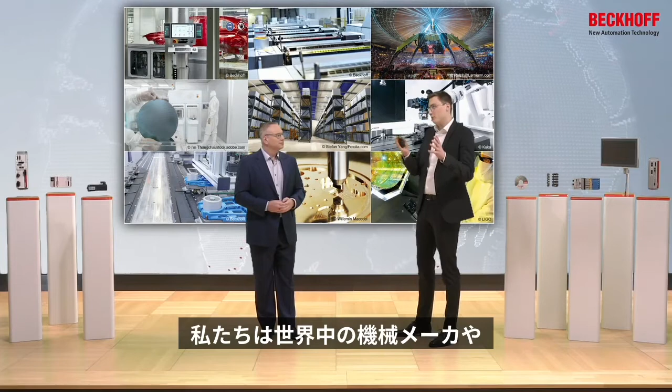Yeah. So maybe to bring this together and coming a little bit back to our bigger story, we are talking with machine builders and end customers from more or less all over the world, so Hawaii included. And we are doing this with companies from all kinds of industries, so from manufacturing to pharmaceutics and to cosmetics and everything else. And to prepare for this week, we have actually written down what these companies all tell us, what they think are the big challenges they have at the moment and which they will have in future. And this leads us to the following chart.

So we have written down some challenges which end customers and machine builders from different industries face at the moment. For example, the need to reduce the space requirements of the machine. Maybe Rob, can you talk a little bit about one or two of the challenges which are there?

Well, that's a little bit of everything, right? We want to always make the machine smaller, but if I'm doing things in a clean room, right, then my space is really expensive. Also, if I'm doing it somewhere where it's cold. Anything I can do to reduce those environmental constraints and say, okay, I make it as small as possible. I don't need to build a new factory. I don't need to build a new clean room. I can do more with less.

For pharmaceutical, things like track and trace is really important, that we're able to know exactly what goes in every product. And then things like no glass-to-glass contact, so that there's a lot less chance of breakage. And that's really well done with XTS and XPlanar, because each product then sits on its own mover. And we can pull those out independently, so there's no longer wasting, oh, one of these was bad, we need to scrap 20. No, one was bad, we scrap that one. And we know exactly which one that was.

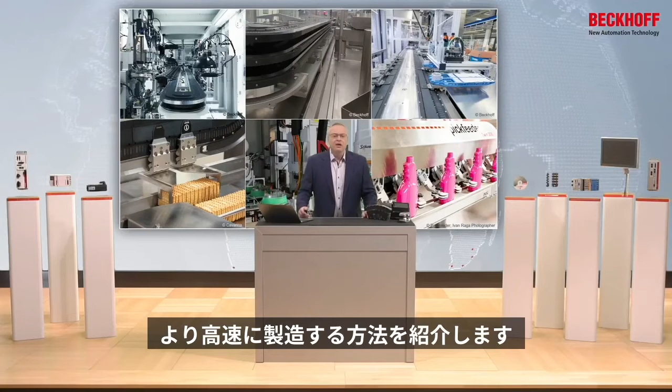So if we take a look at some of the existing examples that we've got out there, we do things with heavy movers and 4 or 5 kilograms. We're making the inner housings for airbags on movers. And the XTS was a huge boon to that system. It drastically shrunk the size of the assembly line because only one station needed to be doubled up and the rest of the stations could remain singles.

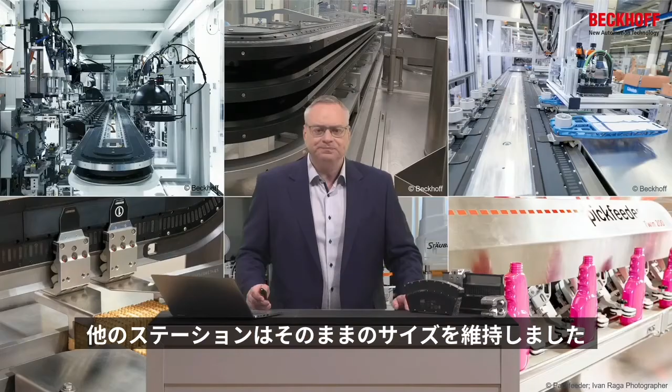Then we've had other places where they need to get a super tight format. So we needed to get movers 20 millimeters spacing together, but the movers are 50 millimeters thick. So the only way to do that was to stack them up. And because the XTS is so thin, we're able to stack 3 layers of an XTS on top and now bring tooling in at a 20 millimeter spacing.

We've had other customers use multiple movers together to have 2 movers carry a varying dimension of product. And we've had other systems where they'll bring in various holders that then mate to the movers and continue through. For the last year and even earlier, we've been producing 3 XTS fully finished systems per day. So there's thousands of systems out in the field, more than 12 kilometers of XTS installed, and it continues to grow. And that's because the XTS allows you to put a mover wherever you want it.

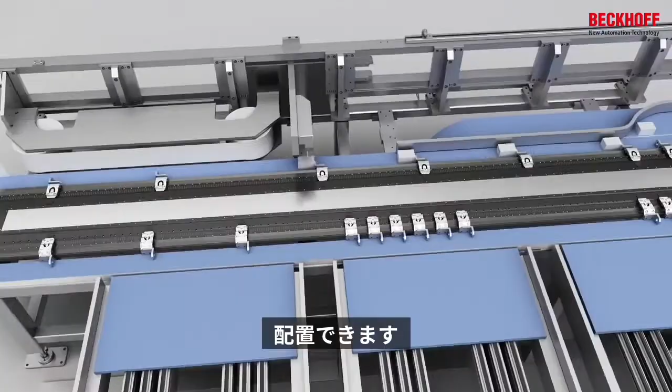And you can place the movers with different products in different places without even necessarily the touch of the button. It might actually recognize the product and recognize that it has to go to a different location or has to make a different format. So maybe for this product I want to group up 6 at a time and I want them all evenly spaced, or I want 6 at a time, but I want them separated out because they're going to go into a different form of packaging. Basically, each mover as it gets the product can figure out and decide where it needs to go.

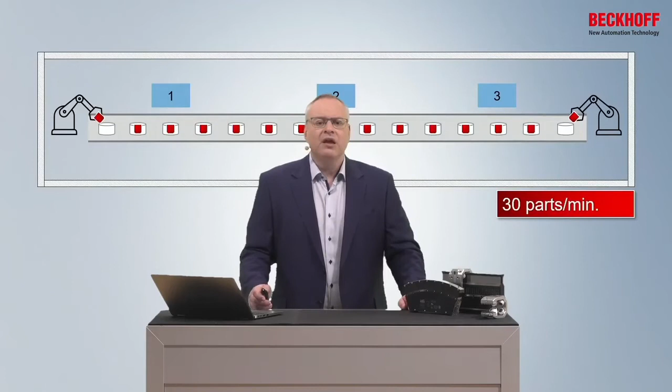So a typical transport system, or a lot of machines, have an indexing chain or some form of indexing system where basically all the processes are tied right together, and I index the mover from station to station and say, okay, there are now X number of movers in front of you, or X number of products in front of you, work on them, and then everybody wait, I'm going to index everything, and then everything can work again. Or I go to an asynchronous flow, but an uncoordinated system.

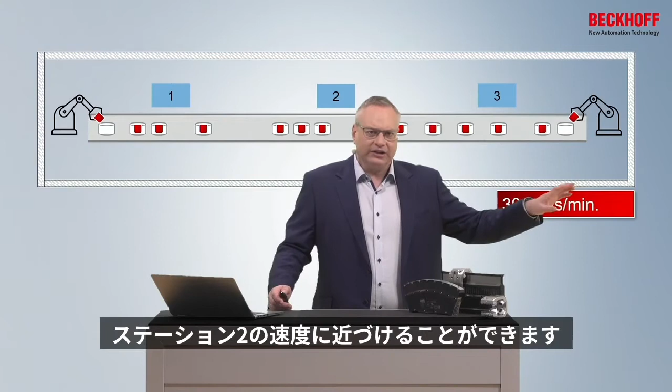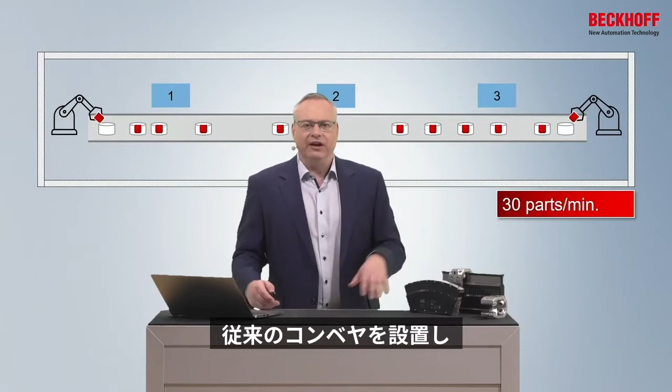And now I have buffers, and normally I have to put a lot of conveying in between each machine. So the product that comes out of my processing station 1, my machine 1, comes out at whatever rate it runs at. I can get it close to the rate of product of station 2, but not necessarily exact. And for that, I'm going to need a bunch of buffering space. So I will have a conveyor, typically conventional conveyor, that's holding a number of products.

And as soon as station 1 lets go of the product, once it gets to station 2, I've lost the information about that product. Or someone comes along and says, yeah, I need to take one of these for inspection. I have no idea which product is in which order, so I have to re-find it at station 2 if I want to know anything unique about that specific product that was produced for track and trace.

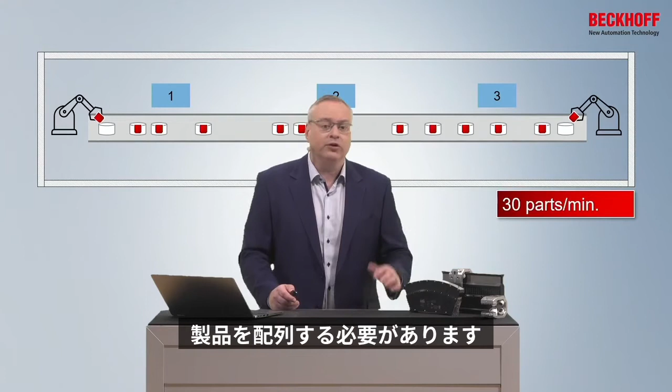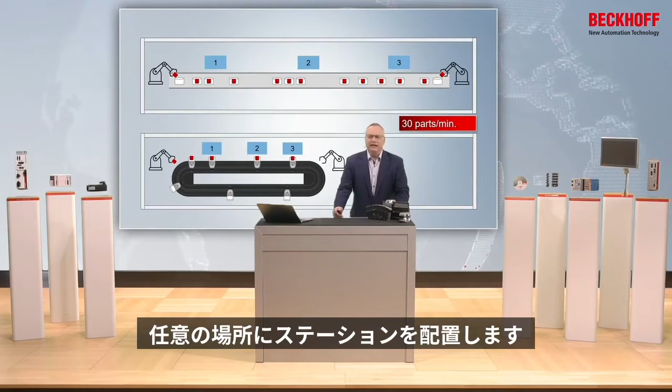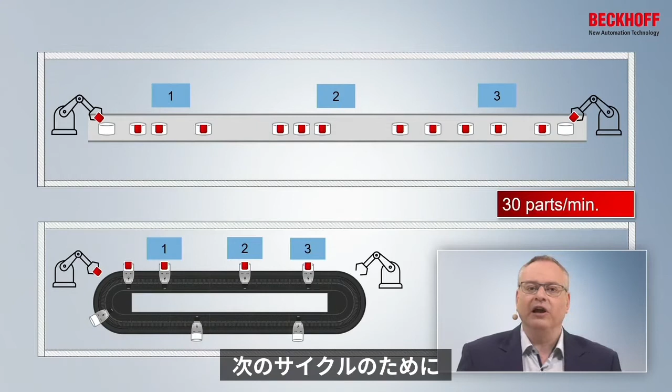So what we do with the XTS is we can make it a lot smaller. So we'll put the stations where we need them. So now I directly take product out of station 1, transfer it asynchronously to station 2, and from station 2 to station 3. So oftentimes I will have product underway. So when station 1 and 2 are working on product, there's a mover bringing product into the station for the next cycle.

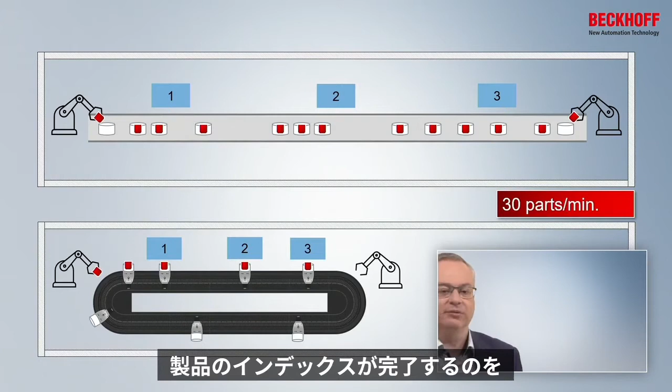So my transition of my motion times is a lot quicker, and I get a higher throughput because I'm not waiting for the entire system to index the next product in. Or I go and say, okay, I'm able to make 30 products per minute. Everything in my system waits on the middle station. So the middle station takes 2 seconds. I can't speed it up. If I try to speed it up, I'm going to be detrimental to my process. So ideally, I'd want to slow it down.

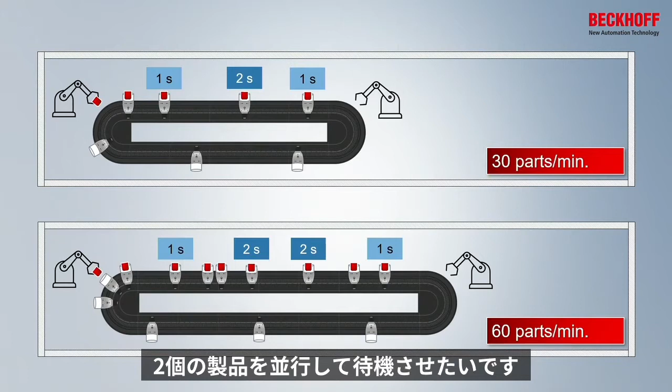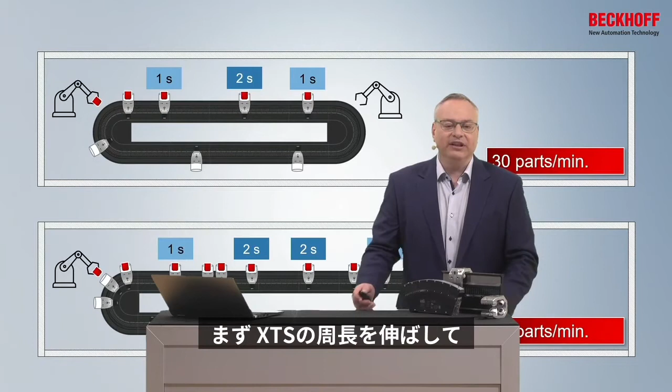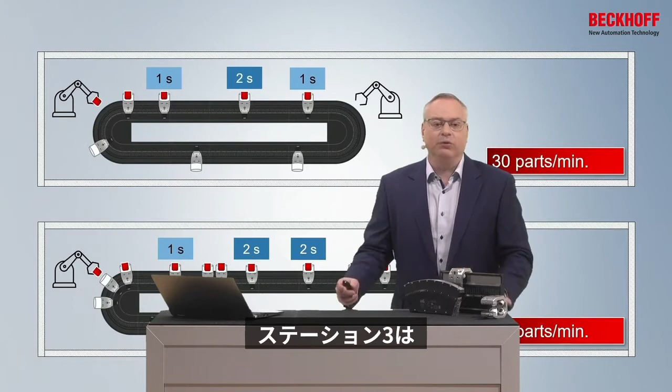But to get anything faster out of the machine, I need to work on 2 of these at a time. And if I have a typical indexing system, now I need to have every station have 2 at a time, because I will index 2, work on 2, index 2, work on 2. With the XTS, we can change that up and say, fine, we'll do that. But now I'm going to space everything out and say, all right, asynchronously, station 1 is kicking product out at whatever rate it can achieve. And then station 2 is working on 2 at a time. Station 3 is working on 1 at a time. So I don't need to double everything up. I only need to double up the stations that need the time.

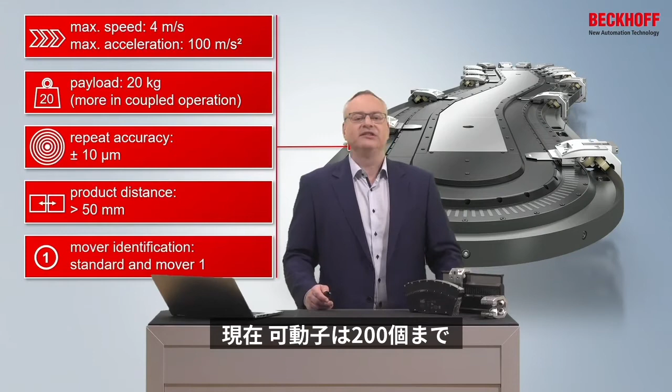In my toolkit, I've got some very simple components. I've got some motor modules that provide the current, and they provide the feedback of the system to tell me where the movers are, and they drive the movers around, right? And those motor modules get me all of the capabilities of the XTS. Very high accelerations. With different tracks, we can do very high payloads, 20 kilograms, even more. 80 kilograms, 90 kilograms, that's all doable. Super high accuracy, very small product spacing, all of that extremely flexible on the XTS. Systems up to 100 meters in length, 200 movers, that's very easily doable today. And that will only extend.

Then we take our movers and we mount them on a rail system. And that's what gets the movers around. That's what holds everything in place and allows us to go through the curves at very high speed. So we have a few different versions of rails. You can make your own, but commonly we do either an on-top rail where the mover is mounted directly on top of the XTS. This allows us our thinnest form factor. If we need to go with heavier payloads or higher speeds, now we can put in a neighboring rail. So we put a rail next to the motor modules, steel construction, and now we can put 20, 30 kilograms on it, or we can run extremely fast through the curves, or with extremely light movers. So we have those capabilities as well.

And then we have the thing that brings it all together, and that's the PC. And we pick and choose the PC depending on the application. So the PC runs the XTS with the standard TwinCAT software, the same TwinCAT I'm used to using. But now we just have the XTS in there as well, and the PC can run the rest of the machine generally very easily. If it can run 200 movers on 100 meters of XTS, it can run the 50, 60 other axes quite easily. So then we pick the PC right for the application. Either a small one for machines 10, 15 meters in length, a medium-sized PC for systems that are maybe up to 60 meters long, and then once we start getting to 100, 150 meters, we'll go to what we call the big iron, that allows us to handle the hundreds of movers and hundreds of meters of track.

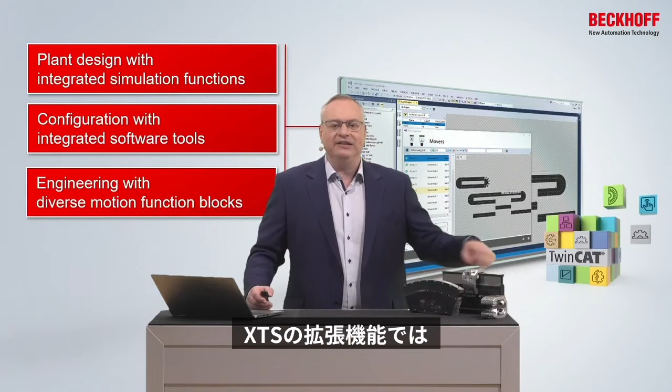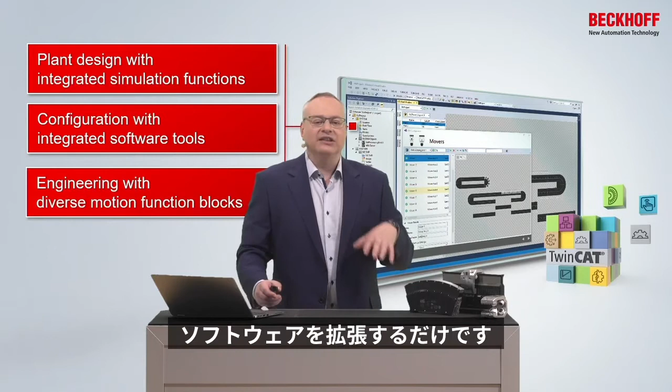With TwinCAT, everything's all integrated into one place. We've got one piece of software that has different functions within it. So we have our HMI directly in it, we add the XTS extension into it, and I use all the same motion function blocks that TwinCAT has, with some advantages for XTS, but all of my standard function blocks already work with the XTS system. So it's now really just an extension. So that's what we have. We have the XTS extension, the HMI, the motion control, but we have everything else that TwinCAT can already do. Analytics, vision, all the rest of the machine can be put into that same PC that's already running my XTS. And that's how I can get an awful lot out of my machine in a very small space with an XTS and TwinCAT.

So far the short walk through hardware and software of the XTS system by Rob.

Rob has left the stage. He's busy because he has to check for the ice hockey results. Sweden and Canada are in the quarterfinals, and he's from Saskatoon, so he has to check out if his team is doing well.

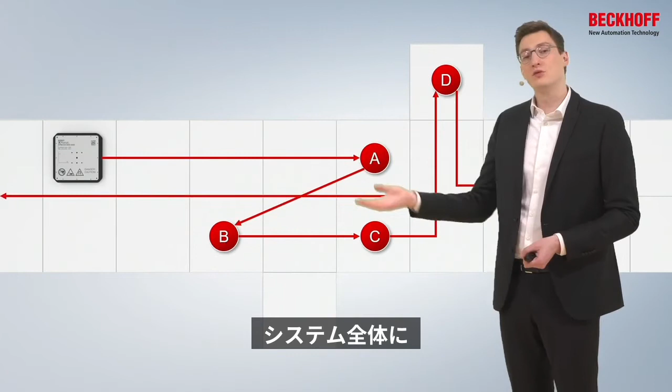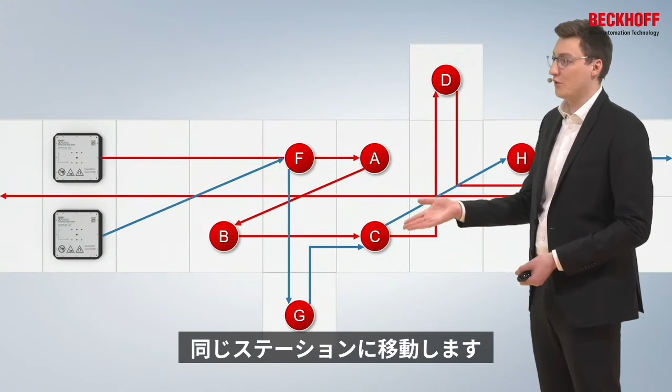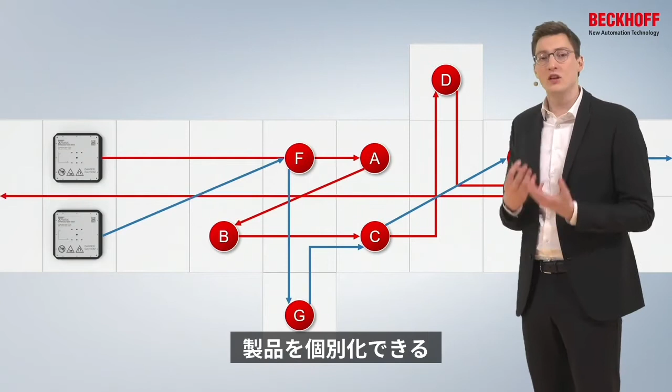The chaotic movement becomes even more evident if we add another mover, which goes to different stations or sometimes to the same station as we see with station C. This shows very nicely, at least in my opinion, that the XPlanar is perfectly capable of enabling the production of different products at the same time in the same machine. So this is really full flexibility because all of the products can overtake each other. You can take products out of the production stream to inspect them, to do some rework. All of this is possible, and this really allows for truly flexible machine building where you can build truly individualized products.

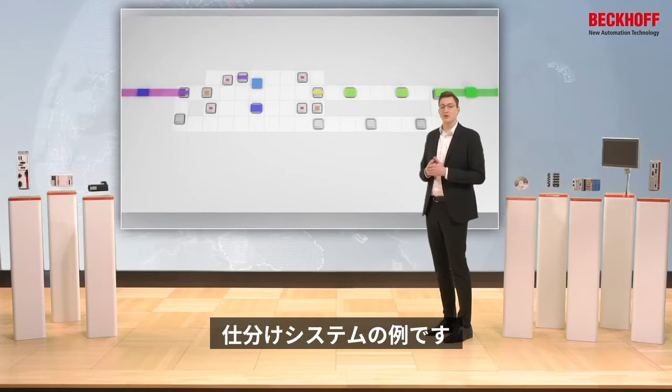Another thing which is done quite frequently with XPlanar is using it as a buffer or as a sorting machine. So with XPlanar you can build up wonderfully designed 2D buffers and sorting machines. In this case it's about making sure that the biggest boxes come out of the machine first and the smallest one last. And so the XPlanar system takes over the sorting task in this case and makes sure that the correct order of products which is required by a succeeding process is established.

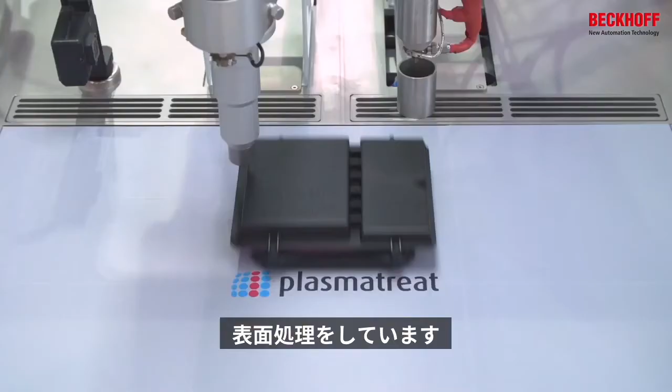Last but not least, it is also possible to use XPlanar beyond the sheer means of transport. You can also use it as a positioning device for processing. This is shown quite nicely in the application from Plasmatreat, where a plasma nozzle is activating the surface of a plastic part in this case. And usually the plasma nozzle is mounted to a 6D robot, and this 6D robot is moving the plasma nozzle over the part. And with the XPlanar, this is no longer required because the XPlanar mover is doing all the positioning of the part in front of the plasma nozzle.

So it gets significantly easier to do the entire setup of the machine. You do not need a complex 6D robot. You only need the XPlanar system and then maybe one very simple axis to move everything back and forth. So the machine footprint gets smaller, everything gets less complicated, you do not have to take care of so much maintenance. It's really a simplification of the system.

If you are now in an industry where it's not about mounting or plasma cleaning, then it could also be interesting for you to know that we have solutions for very, very clean environments or for very, very dirty environments at the same time with the same product. This is our stainless steel mover series where we completely encapsulate the XPlanar mover in stainless steel, and this makes it perfectly cleanable, for example with detergents which are common in the food industry. And it also makes sure that no particles are leaving the XPlanar mover, so that there is no outgassing of the mover into the environment, which could also be interesting for applications in the pharma industry, for example.

Not the one I showed, but generally the XPlanar tiles can also be hidden behind stainless steel. So you can put a thin layer of stainless steel on top of the XPlanar tile, and then you have a very, very cleanable surface. And this allows you really to hide the entire system behind stainless steel. And in this case, you can really build a hygienic design for the machine, and you can really get super simple with all the mechanics around the machine.

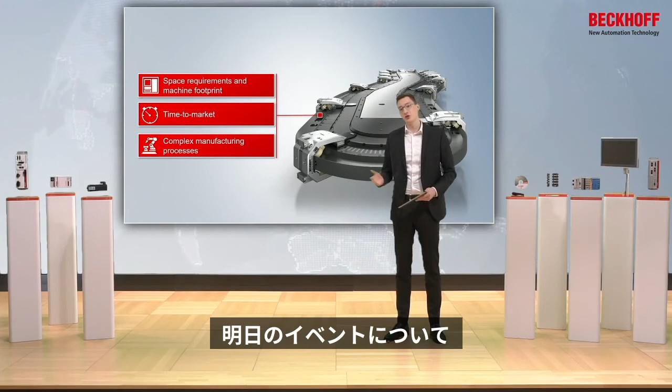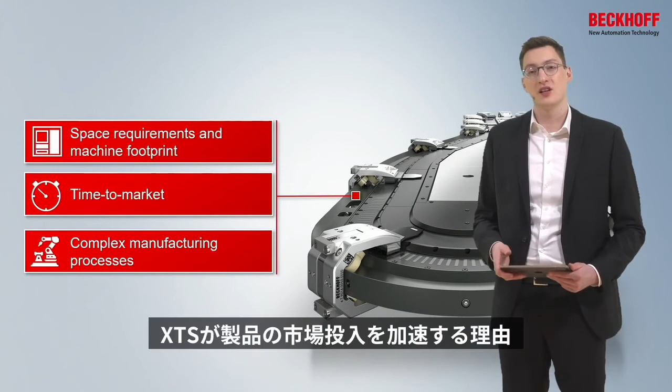But before we would like to say goodbye, we would like to give a short preview on what's coming actually tomorrow. Tomorrow, we would really like to focus on the challenges we have presented in the beginning of this presentation. So we would like to look at the things which we can specifically solve with using XTS. We want to look at the feature of the XTS system which enables customer-specific trajectories, and we would like to show you how we can reduce the space requirements of an XTS system. We would also like to show how XTS reduces the time to market of your products, and we would like to dig into very, very complex manufacturing processes utilizing the new XTS technology, NCT, which stands for No Cable Technology and means energy and data on this mover here.